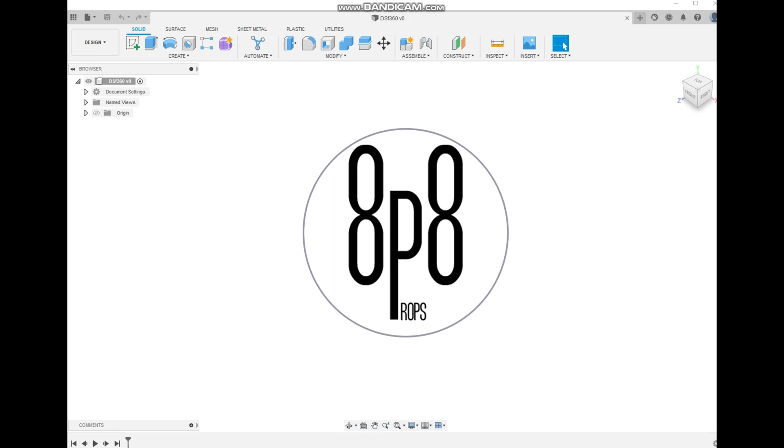Let's start with a new sketch, starting with a circle. I'm not going to worry about measurements this time, we're just going to start drawing. Okay, so here's one circle. I'm going to make this circle a little bit bigger, and that'll do it. We've got two circles.

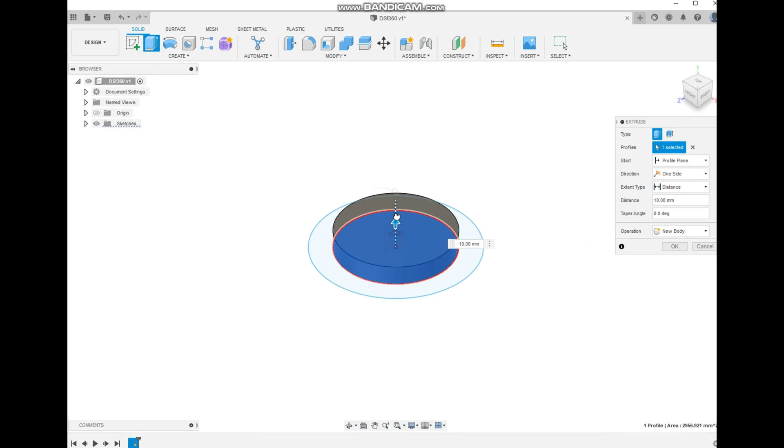Let's extrude this first one, so high, and click OK. Put our sketches back on.

Going to extrude this second one, but we're going to do two sides. First one, get them a little—whoops, let's go back to that, clicked on it too fast. So we're going to extrude this two sides.

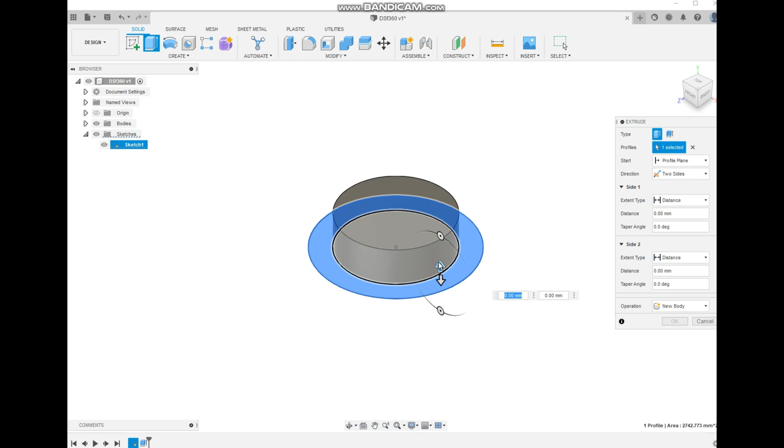And just like that, and the bottom, just a little bit. I'll show you why I'm doing that in a second. Just so it looks like this.

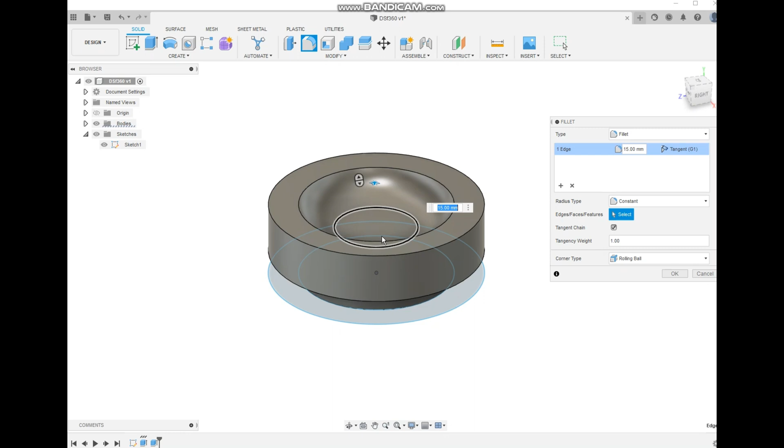Now I'm going to click this inside ring, click on a little fillet, click the arrow, and let's make it go down like a bowl. So click OK. I'll show what it looks like so far—that's pretty cool, not exciting, but pretty cool.

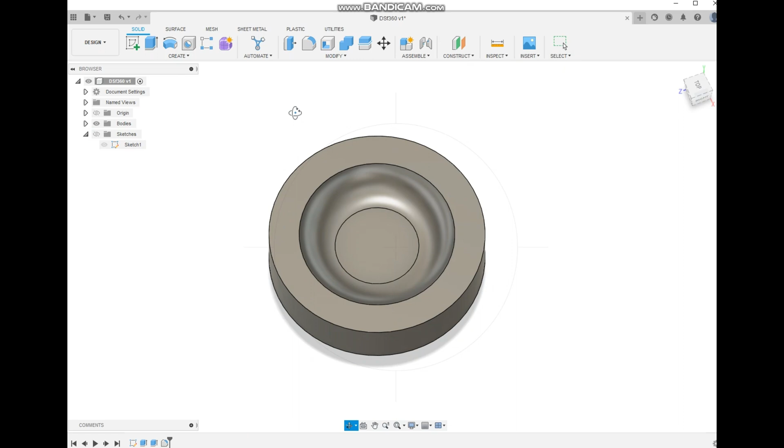Okay, next thing we're going to do is create another layer on top of this layer, so I'll show you what I mean. We're going to do a new sketch right on that guy. Now we're going to take our rectangle tool, and instead of the center here, I'm just going to pick a little bit further over here. You'll see why, and I want to do something like this—have it hang over and go like this.

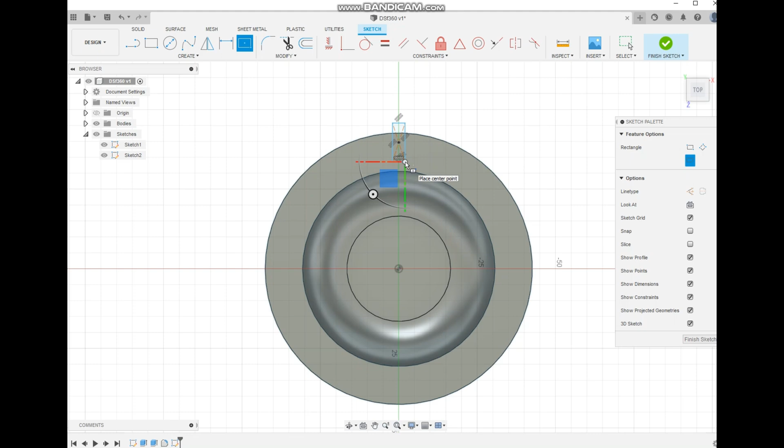Let's see, something like that. There we go. Now you can see we need these little prongs to go around the whole circular droid socket—this makes our droid socket actually look cooler anyway.

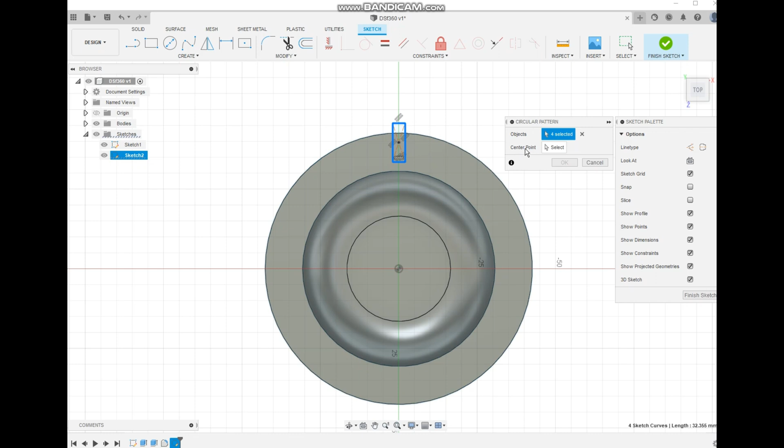So let's do this. Let's replicate this whole square by simply going to create circular pattern, and we have it selected. We need to select the center point—where are we going to spin it around? Right here.

And let's go crazy, let's add, I don't know, let's make it a serious droid socket—let's put 12 of them in there. How's that? Click OK. Now you kind of get the idea, it's starting to look like a droid socket.

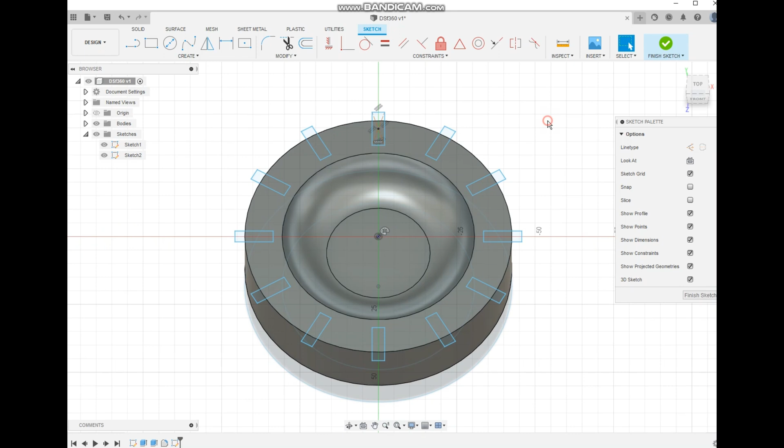So let's highlight all these and shut the bodies off. Let's just highlight all these, and I'm going to press the control button and get rid of all this stuff—anything I don't want selected. I want all these, and we're going to extrude all these guys.

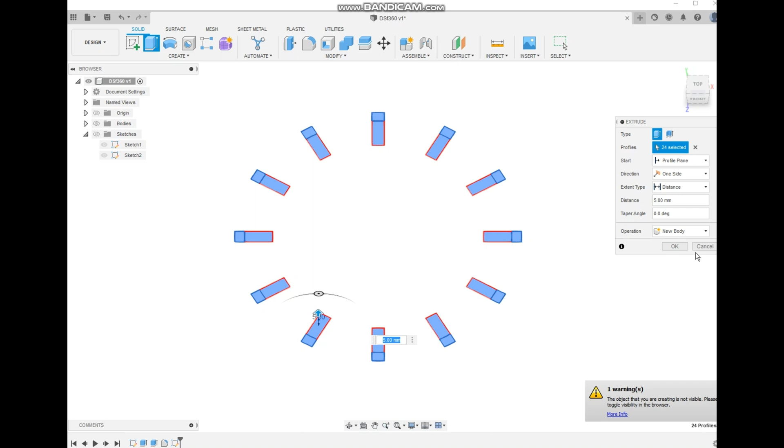Let's just extrude it 5 millimeters, let's see how that looks. Click OK, we have our bodies on—turned it back on. So look at that, starting to get there.

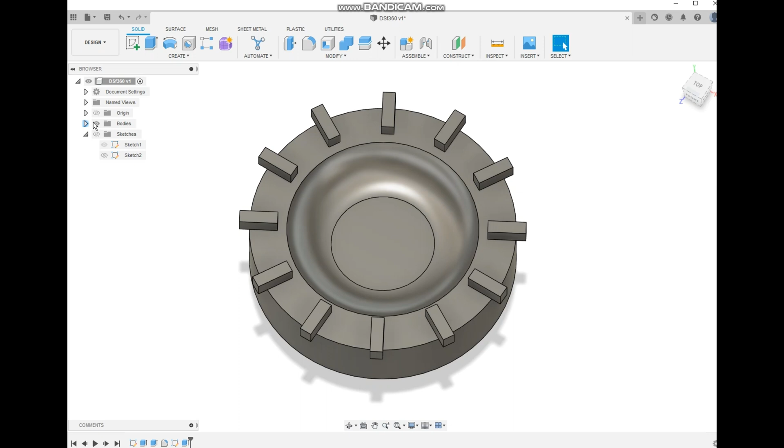Still not complete, so I want to take these guys and kind of sink them in a little bit. So let's go back and select all of them, let's shut those bodies off, and put the sketches back on.

And what I want to do, let's select all these guys, press Control to deselect all these other highlighted items. Now they're all highlighted, let's put our bodies back on.

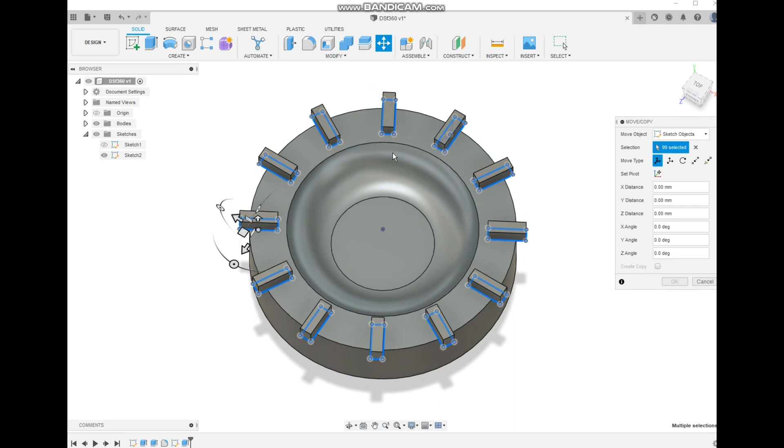And then we're going to right click on any of them and say move, and I'm going to move it into those by, let's say, 2 millimeters, -2. That should be good, let's see what happens. And look at that, they just got nice and sunken in—so that looks more like a droid socket.

How cool is that? Okay, next we need to put some holes here, because the socket that goes in a droid socket like R2-D2 has to have some type of grip—obviously it wouldn't even spin if it couldn't grip on anything in here. You'll see what I mean in a second. So let's create another sketch, this time right on...

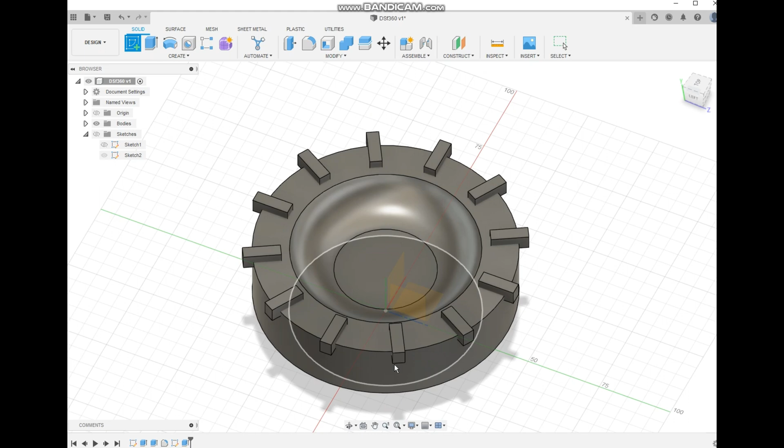Let's just do it right on the top, right here. Perfect. Now let's create a square rectangle, and then we're going to put it right roughly in the middle of everything, like this. Something like that. Then I'm going to select this square and press the X button key to make it a construction square.

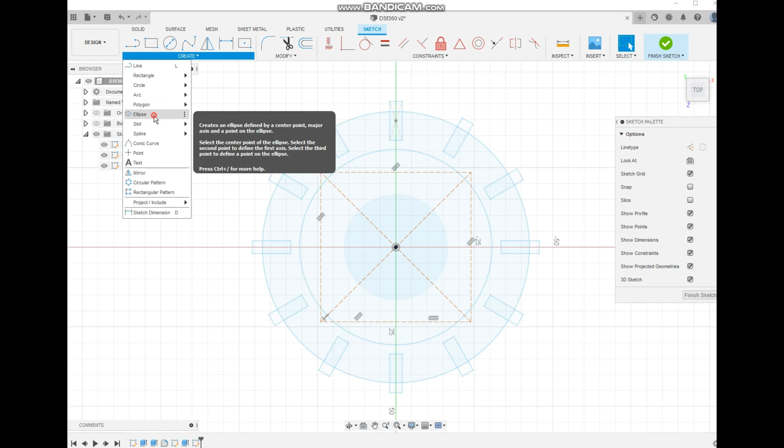Now I want to make an oval on each one of these. So I'll show you what I'm talking about. Let's create an ellipse. Let's shut this body off so it's less confusing. Let's create right here. I'm going to do 3 by 8. Let's see how that looks.

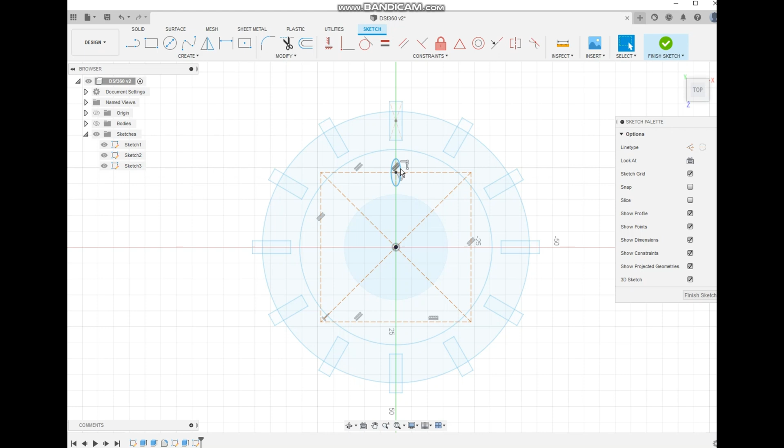Okay, we have our ellipse here. Now, I don't want to copy all these over and move them, so let's just click on it. Let's do our same thing like we did before. Click, and then go back to create circular pattern. Select the center point, and let's add a couple more of these. Let's see, how many does a droid socket need? We'll just do 6. Click OK. There we have those.

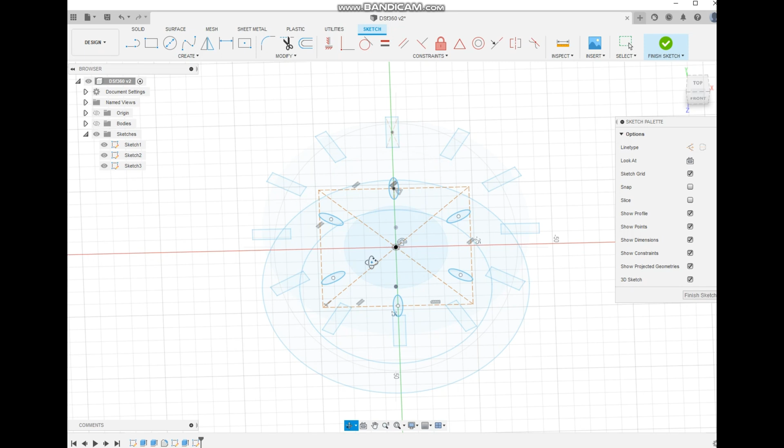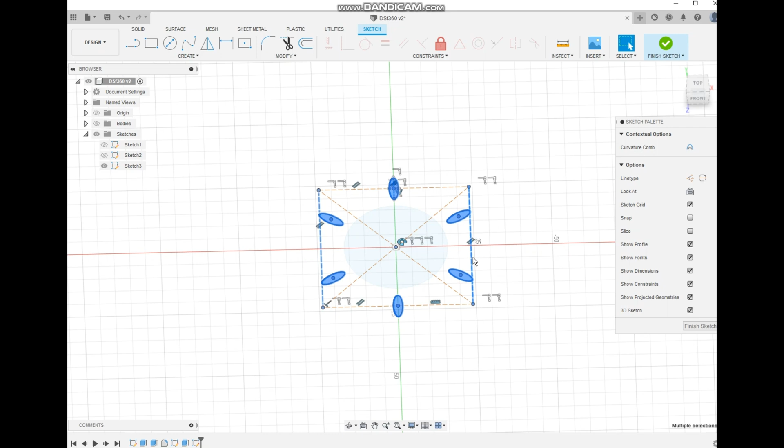And then what I'm going to do now, put the body back on so you can see where they are. So shut the body off. Let's shut all these other sketches off. See if we can highlight that. Press the control key to get anything that you don't want selected. Probably be easier in this case to select the circles. Okay, we got all these.

Let's extrude these. But this time, let's see if we can see that. Let's go up - it gives me a warning because I have the bodies off. There we go, I'm just going to go up like that. Boom. Let's see how that's looking. All right, we got a droid socket.

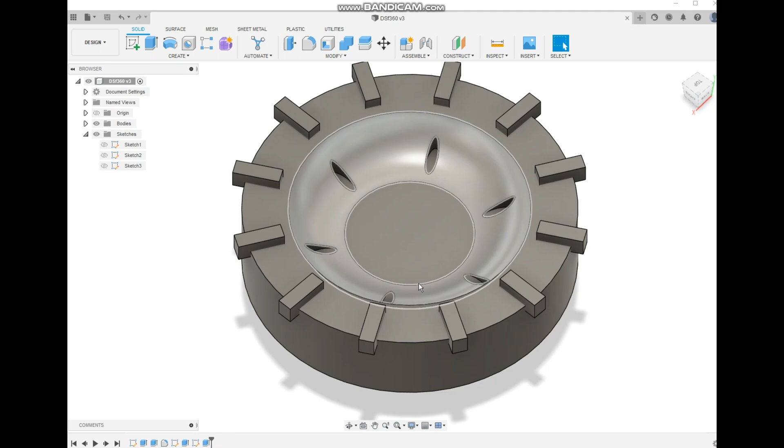Now when the droid R2-D2 sticks his little arm in there, it'll grab onto these guys - 1, 2, 3, it'll grab something to grab onto. And you can enhance this droid socket any way you like.

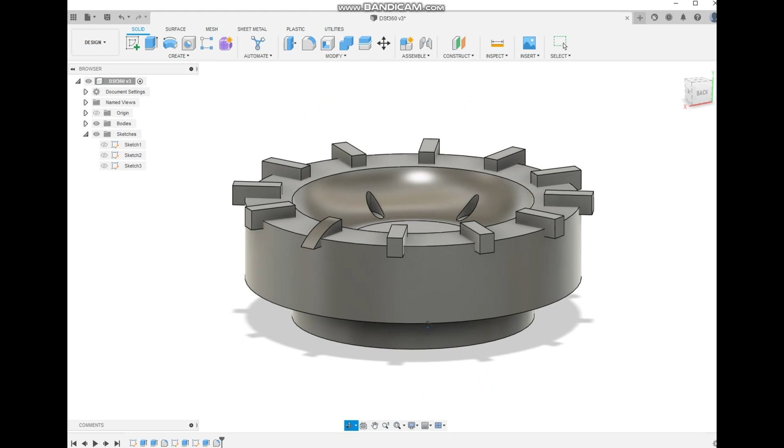For example, I'll give you another example. We could take an end over here, give it a fillet, and you can make each one round or every other one round. So you can go to town on this, make this really cool looking or customize whatever you like. So I hope this gives you an idea of how to make your own droid socket.

Oh guys, and another tip I want to show you - let's say you added or you want to add more of these little portholes. A simple way to do that - let's do that right now because that's very important.

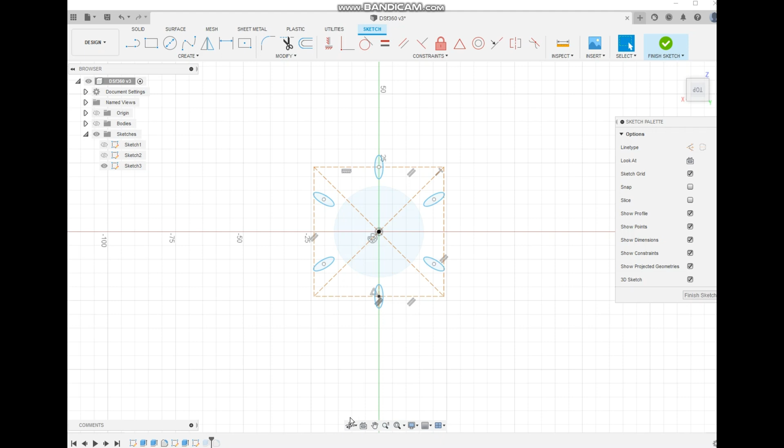Let's edit our sketch right here. We'll shut off the bodies so you can see them. See this little symbol right here? See this little guy? That's your symbol for a circular pattern. Just double click on it and we can increase it. Let's do that again. Get it just right. There we go.

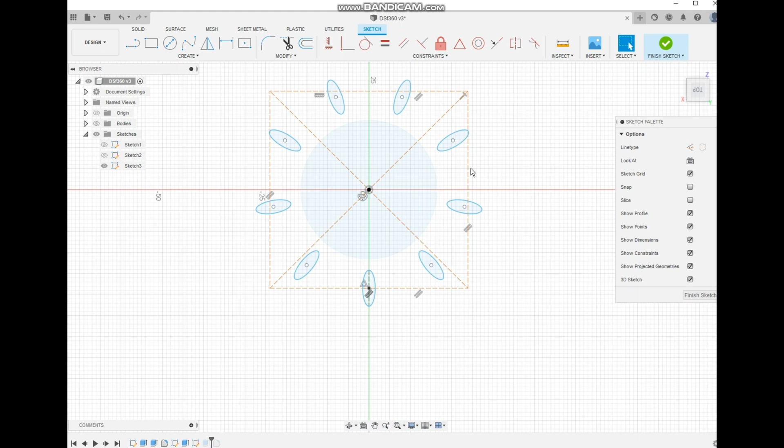Double click on it and we can just do this - 7, 8, let's put 9 and see how it looks. Put our bodies back on and finish the sketch. But you notice they did add, but they didn't extrude.

So we just select them. I'm just going to highlight this one and press the control key, select him. That's it, it just added 3 of them. And then we're going to do the same thing - extrude. There we go, 1, 2, 3, and then extrude. There we go.

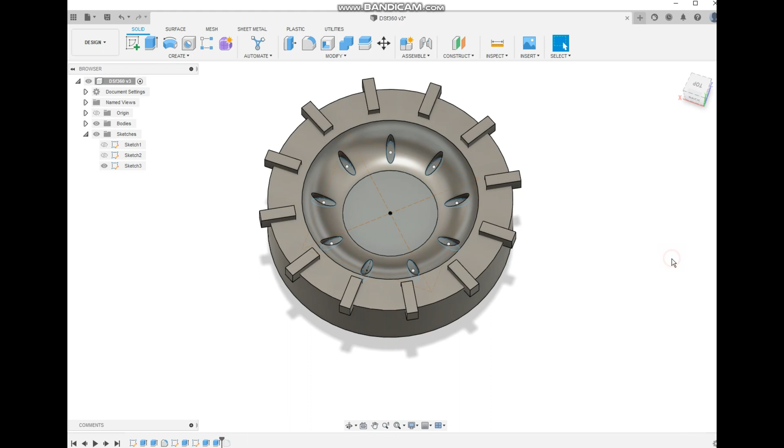Boom. Shut those off. Now we got a nice droid socket. If you have any questions, just let us know.